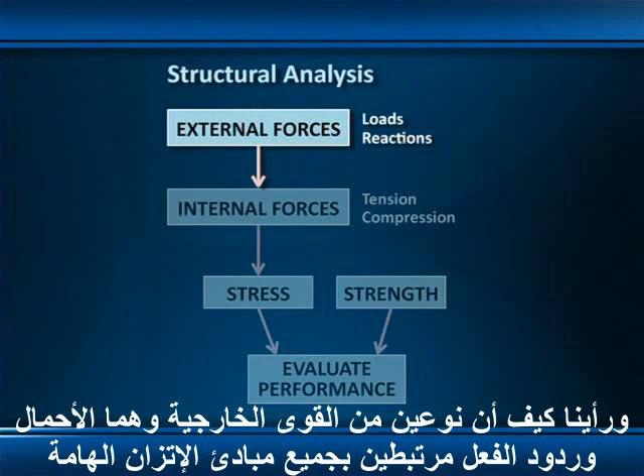Welcome back. Last lecture, we began our exploration of the science of engineering mechanics, the study of forces acting on bodies. To guide that exploration, we developed this roadmap, a diagram that shows the major concepts used in structural analysis. Last lecture, we focused on the first block of this diagram, external forces, and we saw how two types of external forces, loads and reactions, are related by the all-important principle of equilibrium.

Along the way, we met two men who pioneered the principle of equilibrium: Isaac Newton, who formalized the principle in his first law of motion in 1687, and Newton's predecessor, Simon Stevin, a unique Renaissance-era mathematician who developed the world's first proof of equilibrium using an ingenious thought experiment consisting of a string of beads draped over an inclined plane.

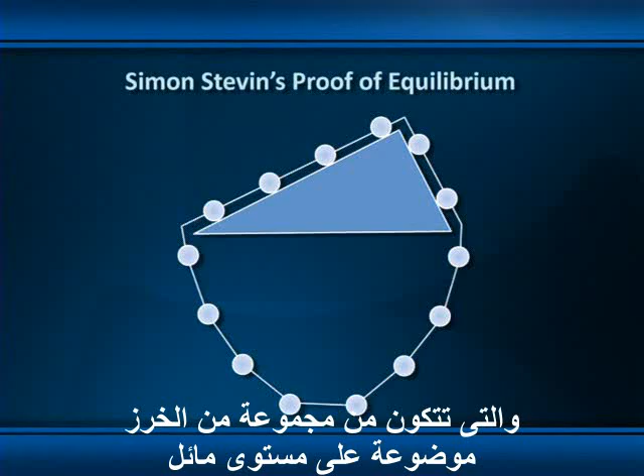Stevin was evidently quite pleased with this insight because in his book, underneath the diagram, he wrote, "What seems mysterious can be understood," a phrase he later adopted as his personal motto.

Well, in the spirit of Simon Stevin, let's focus this lecture on understanding the remaining major concepts of structural analysis on the roadmap: internal force, stress, and strength.

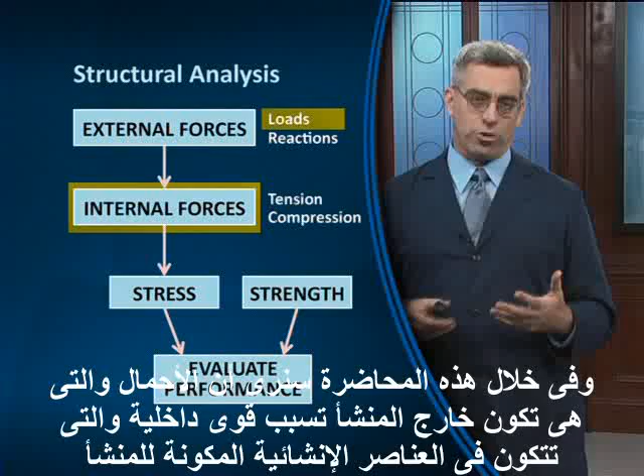During this lecture, we'll see that loads, which are external to the structure, cause internal forces to develop within the structural elements that compose the structure. And we'll see that these external and internal forces have to be in equilibrium with each other.

We'll see how internal force is manifested as stress, a measure of the intensity of that internal force. We'll also learn once again about strength, the characteristic value of stress at which a particular material fails, and we'll see where strength comes from, how it's determined experimentally in the lab. Finally, we'll compare stress with strength to evaluate structural performance.

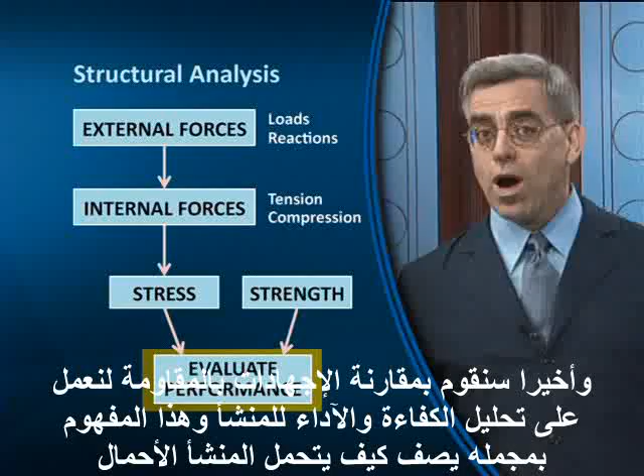These concepts in total describe how structures carry load, and so they'll lie at the very heart of our analysis of the world's great structures through the remainder of this course. When all is said and done, I hope that Simon Stevin's motto, "What seems mysterious can be understood," will ring true for you as well.

Now, there's a good reason why all this mysterious stuff can be understood. Much of what we know about the strength of engineering material is gleaned from a very simple laboratory test that scientists and engineers have been using for centuries. Today we call this the simple tension test.

It's done by simply taking a specimen of material, mounting it in a testing machine, and then using that machine to slowly pull on the specimen and stretch it in tension until it breaks in two pieces. That's it.

If you can understand this test and the information we glean from it, then you'll understand the concepts of internal force, stress, and strength, the subjects of today's lecture.

Oh, and by the way, the test specimen that I just used for our simulated simple tension test is, in effect, a structural element that's subjected to pure tension. In other words, it is one of our 6 basic types of structural elements.

So, by the end of today's lecture, you won't just understand these key concepts from our roadmap, you'll also understand how tension members work in great structures.

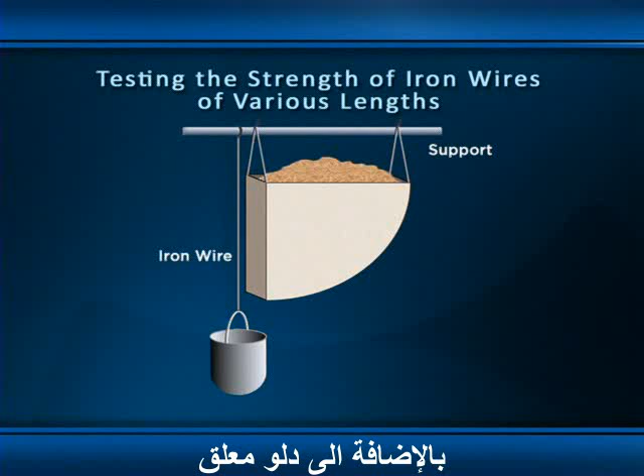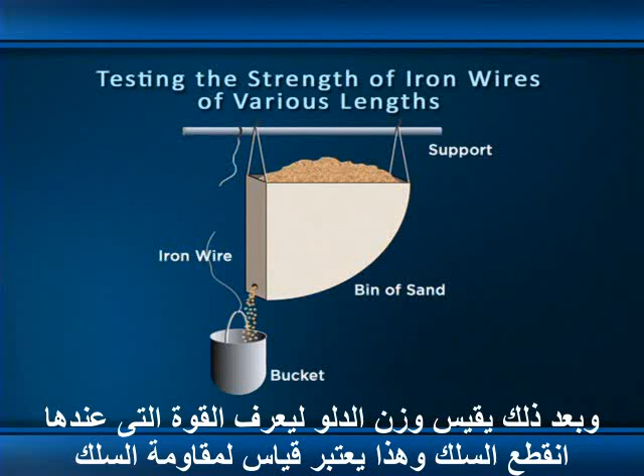To do the experiment, Leonardo hung a bin filled with sand above the bucket. He opened a hole in that bin and allowed sand to pour out into the bucket gradually until the wire broke. He then weighed the bucket to determine the force at which the wire had broken. This is a measure of the strength of the wire.

Now, as one of the earliest systematic experiments on materials, Leonardo's tension test was a noteworthy effort. But as science, it was mostly unsuccessful because Leonardo erroneously concluded from his experimental data that the strength of iron wire depends on its length. In fact, what we know today is that the strength of any tension member is actually independent of its length, a fact that ultimately was proved by our next great pioneer of engineering mechanics, Galileo Galilei.

Galileo published the world's first comprehensive scientific study of the mechanics of materials in 1638. And in an interesting, indirect way, we actually owe this publication to the Catholic Church.

6 years earlier, Galileo had defied the Church by publishing his assertion that the Copernican theory of planetary motion was indisputable truth. As a result, he was called to Rome, he was condemned, ultimately placed under house arrest in his villa in Tuscany for the remaining 8 years of his life.

Throughout these final 8 years, Galileo focused his work primarily on mechanics, probably because the subject was likely to be significantly less controversial than cosmology. As a result, his great work was published during this period. It was titled Two New Sciences and really was his seminal treatise on engineering mechanics.

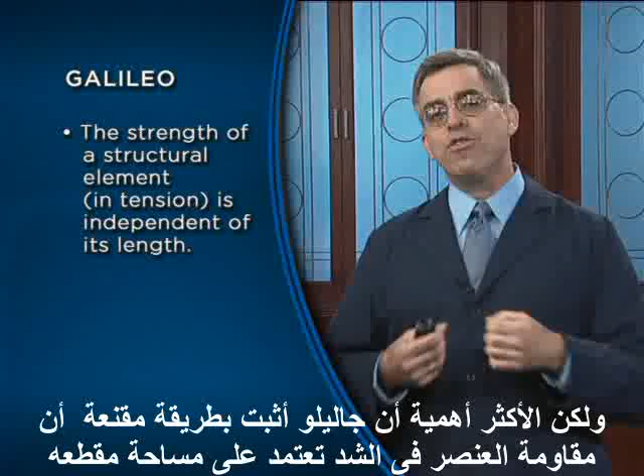Galileo's experiments established the fact that the strength of a structural element is independent of its length, and thereby he disproved Da Vinci's earlier experimental results. But more importantly, Galileo showed convincingly that the strength of a member in tension depends on that member's cross-sectional area.

Okay, so what's a cross-section and what's cross-sectional area? Well, the cross-section of a structural member is really just the two-dimensional shape that's formed by cutting through the member on a plane perpendicular to its long or longitudinal axis.

So if this were a concrete member, it's cylindrical in shape, the long or longitudinal axis of the member is running this direction, and when I make a cut, I expose this shape, it's a circle, and that circular two-dimensional shape is the cross-section. The cross-sectional area then is simply the area of that circle, pi r squared.

Many other types of configurations of structural members are possible, and you've seen them in the world all around you. This is a standard 2x4 piece of lumber that's used often in construction, and it has a rectangular cross-section. In fact, the very definition of the member, the 2x4, describes the dimensions of that rectangular cross-section.

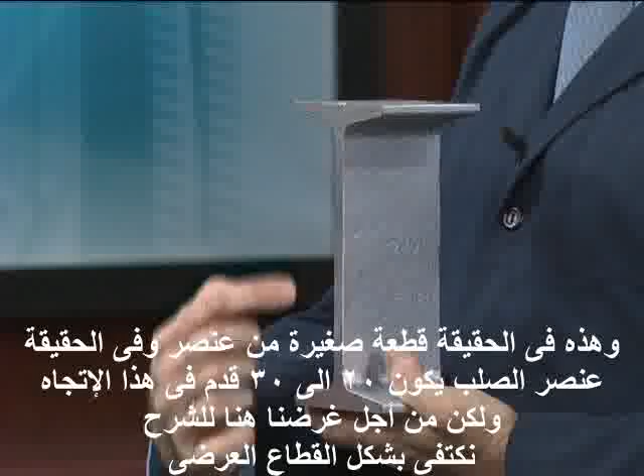In steel, we often see structural elements made with an I-shaped cross-section. Now, this is really just a short segment of member. In practice, the real steel beam probably runs about 20 or 30 feet in this direction. For our purposes here, we're really just concerned with the cross-section itself, which forms an I shape, as you see here. And later on, we'll talk in more detail about I-shaped sections.

For now, recognize that it's composed of three elements. The top and bottom horizontal planes we call flanges. The vertical plane we call a web. And steel cross-sections are also available and often used in hollow tube configurations. This one happens to be square, but we also often see hollow tubes that are rectangular or circular in geometry.

Okay, so back to Galileo. Now, based on his experiments, Galileo discovered that the strength of a member is directly proportional to its cross-sectional area. For example, a member with a cross-sectional area of 10 square inches is twice as strong as a member with a cross-sectional area of 5 square inches, as long as they're made of the same material.

This discovery eventually led to the development of the concept of stress. But it took a long time, almost 200 years, for engineers and scientists to ultimately get to that conceptual understanding.

In the meantime, around 1650, an English scientist named Robert Hooke also performed an extensive series of tests on iron wire. These were similar to Leonardo's and Galileo's experiments in that a piece of iron wire was subjected to tensile loading, but Hooke went a crucial step farther.

Rather than simply determining the breaking point of the wire, he also investigated how it elongated under the full range of load, from 0 all the way up to the breaking point.

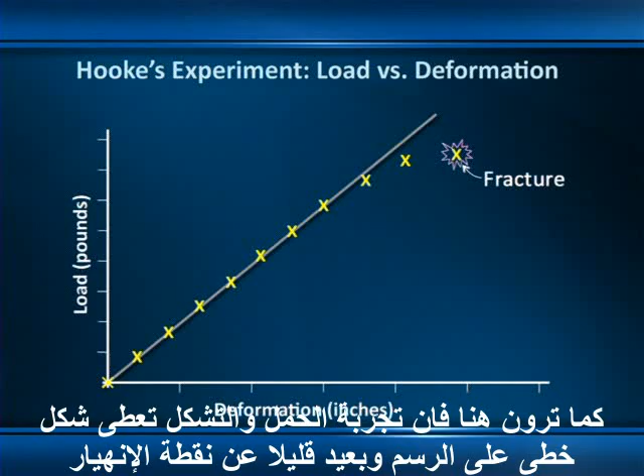Hooke probably made this discovery sometime in the 1650s, but he didn't actually publish it until 1678 because the discovery actually gave him the capability to build very accurate clock springs, and he didn't want to give away his competitive advantage. When he did publish the discovery, he used a simple Latin phrase, ut tensio sic vis, as the extension, so the force.

The discovery of this linear relationship between load and deformation is so important to modern engineering mechanics that even today we call it Hooke's law.

Groundbreaking as it was, Hooke's discovery was fundamentally limited by the fact that he only ever considered the external forces acting on the test specimen. He never actually made the conceptual leap from external force to internal force and then stress.

To see what Hooke overlooked, let's return to our tension experiment and draw a free body diagram of the test setup.

First, we isolate the member, the simple tension member. We then add the load down at the bottom, 4 pounds oriented in the vertical direction, downward. Up above, we'll add the reaction that keeps the body in equilibrium. We'll label that R. And since the body is in equilibrium, we know that because it's not moving, then all the forces acting on it must be in balance.

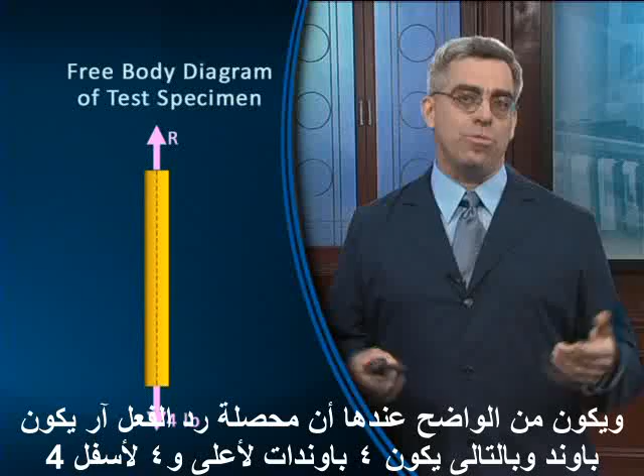Clearly then, the magnitude of that reaction has to be 4 pounds. We have 4 pounds up and 4 pounds down.

This configuration, by the way, is often called axial loading because both the load and its reaction are aligned with the long, or in this case, the longitudinal axis of the member.

But both the load and the reaction are external forces, and what we're interested in understanding is what's happening inside the member. To do this, we have to do another thought experiment.

What we're going to do is imagine cutting completely through the member to expose that internal force. And then we'll use the principle of equilibrium to figure out what that force actually is. Let's use our free body diagram as a way to see how this process works.

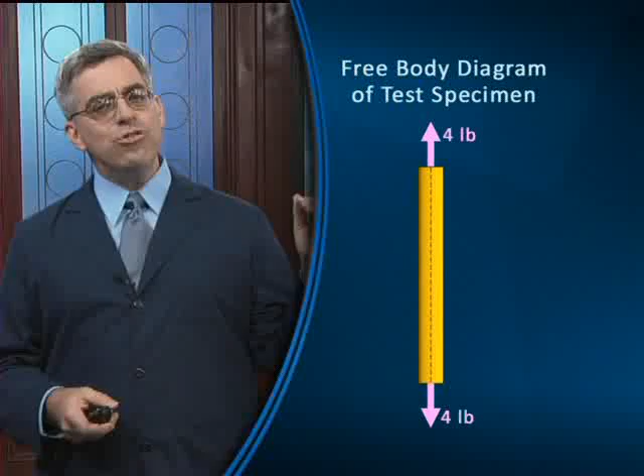Here's the free body diagram, once again, of our tension test specimen. And now here's the location of the cut. It's just a conceptual cut, but it's used as a problem-solving tool.

Now we can isolate the portion of the member that falls below the cut and draw a separate free body diagram just of that segment. The 4-pound load is still applied on the end of the segment, and so the only way that this segment can possibly be in equilibrium is if there's some additional force acting up there on the face of the cut.

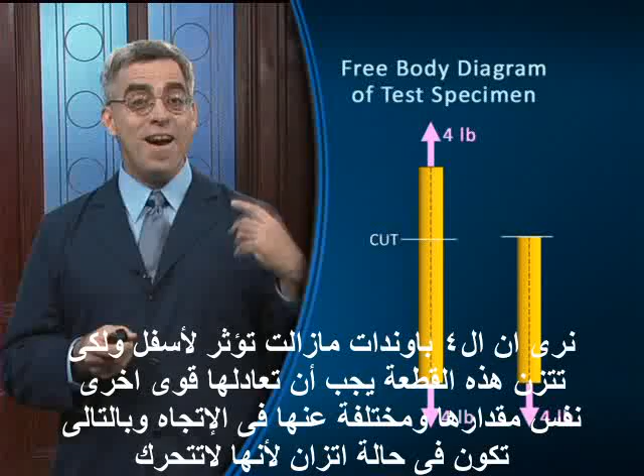We know this little segment is in equilibrium because it's not moving, and therefore there is a force on the face of that cut, and that is the internal tension force, which you can see here. Clearly, the principle of equilibrium tells us that this internal force, F, must be exactly equal to the external load, 4 pounds.

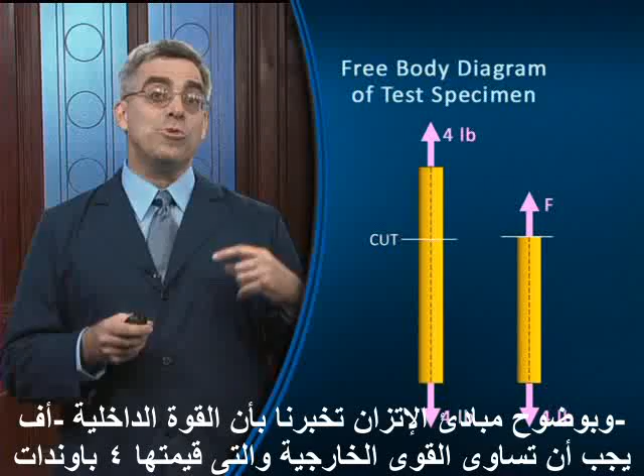Okay? Now, at first glance, this analysis might seem trivial. We applied a 4-pound external load, and it resulted in a 4-pound internal tension force. What's the difference?

Well, there is a difference. It's very important to recognize that the external load and the internal force are two very different things. In the simple tension test, they happen to be equal. But in many other situations, they won't be equal.

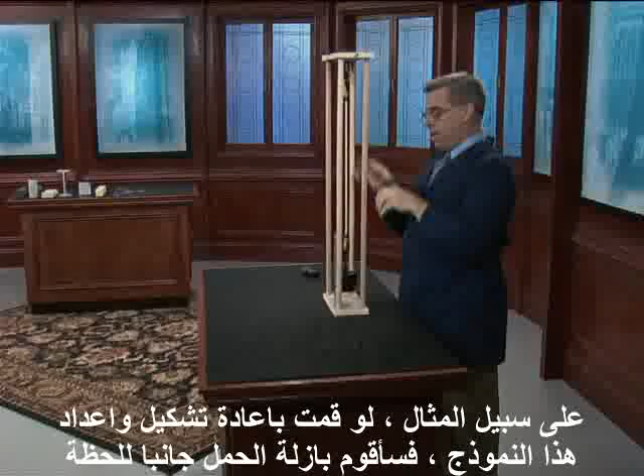For example, if I just reconfigure this experimental setup, that is, if I take the load off for a moment, and rather than having the load suspended from a single wire in one uniaxial test setup, suppose the load is suspended from two wires, which are oriented such that they form an angle.

Now, in this circumstance, there is not one internal force, but two different internal forces, and both of them will turn out to be substantially different from the externally applied load.

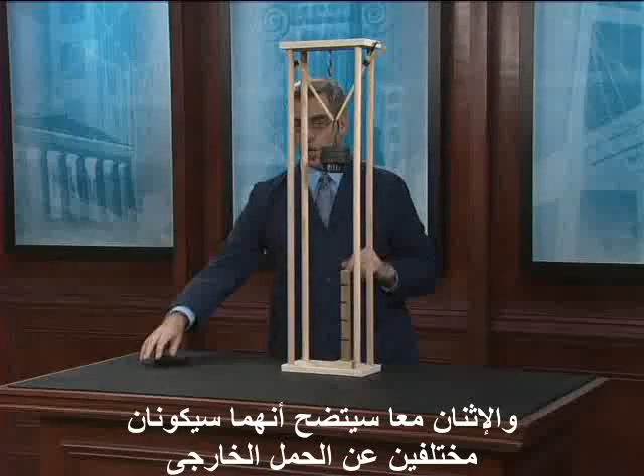More importantly, the external load and the internal force are fundamentally different phenomena. The external load is a concentrated force that's transmitted to the member or members through some sort of physical connection to another object.

In this case, the connection is the pan holding that 4-pound weight. The internal force, on the other hand, is an attraction between the molecules that constitute this material. It is internal. When we apply a load to a structural element, it stretches slightly.

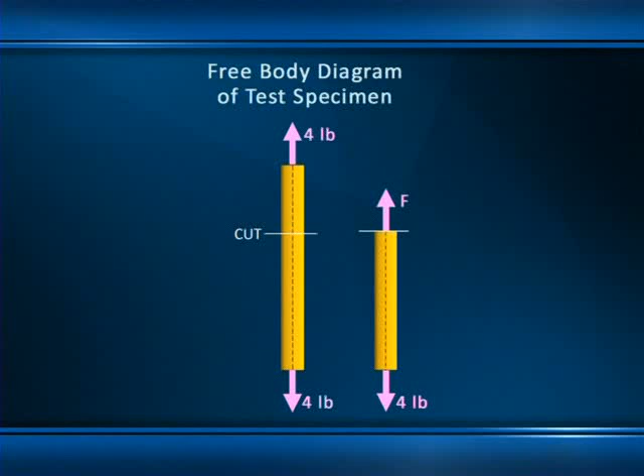As a result, the individual molecules that make up the material have to move away from each other ever so slightly. The chemical bonds between these molecules are very strong, and they resist being deformed. This resistance, accumulated over the entire cross-section of our conceptual cut, is the internal force that keeps the lower portion of this member, as you see it in our free body diagram, in equilibrium.

This idea of internal force as an accumulation of molecular level resistance to deformation is a really powerful concept that actually leads us directly to the concept of stress. This concept was vaguely suggested, indirectly, by Galileo's experiments of 1638. But it wasn't until 1822 that the French mathematician Augustin Cauchy actually formulated the concept of stress as we know it today. Stress is the intensity of internal force in a member.

In an axially loaded member, it's calculated simply as the internal force divided by the cross-sectional area and expressed in units of force per area. For example, pounds per square inch, newtons per square meter. Stress is independent of geometry and material type. For example,

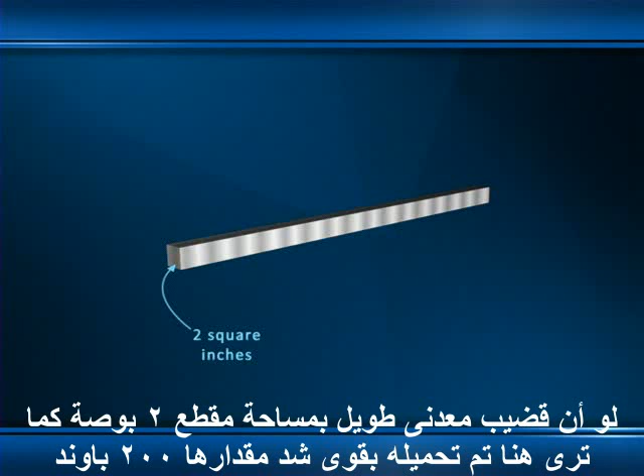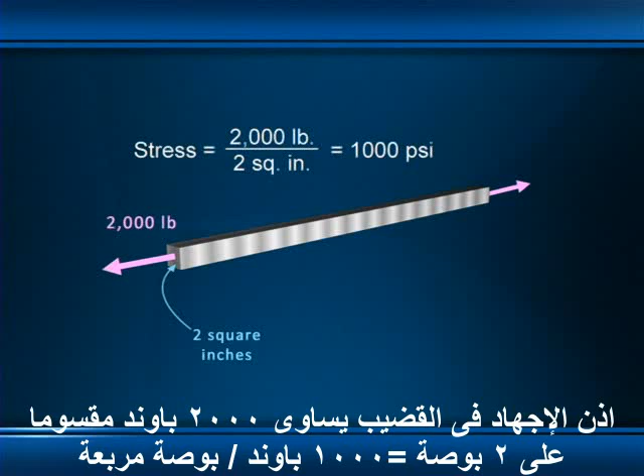if a long steel bar with a cross-sectional area of 2 square inches, as you see here, is loaded with a tensile force of 2,000 pounds, then the stress in the bar is 1,000 psi, 2,000 divided by 2. Now, if a short concrete cylinder that has a cross-sectional area of 10 square inches is loaded with a tensile force of 10,000 pounds, well, the stress is still exactly the same. It's 1,000 psi. In this case, 10,000 divided by 10.

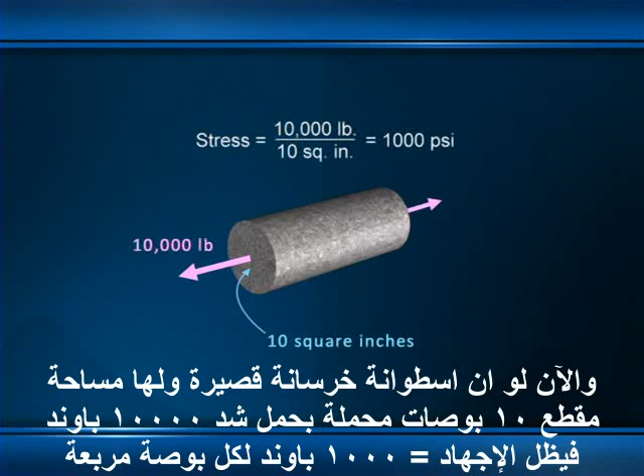The concept of stress is so powerful because the strength of a material is defined in terms of stress. For example, the strength of standard grade structural steel is about 36,000 pounds per square inch. Doesn't matter if the piece of steel is long or short, wide or narrow, circular or I-shaped, the material will fail when the stress reaches 36,000 psi.

Okay, that's stress. Next, Augustin Cauchy's second contribution to today's lecture is the associated concept of strain. Just as stress is the intensity of internal force, strain is the intensity of deformation. As we saw in Robert Hooke's experiments, a member loaded in tension elongates. Strain is a way of characterizing this elongation in a particularly useful way.

Now, beware that in everyday usage, the words stress and strain tend to be thrown around in a very imprecise way and often are used more or less synonymously. In engineering, these are distinctly different concepts, and you have to use the terms very precisely. Stress is a measure of internal force. Strain is a measure of how much the member deforms under load.

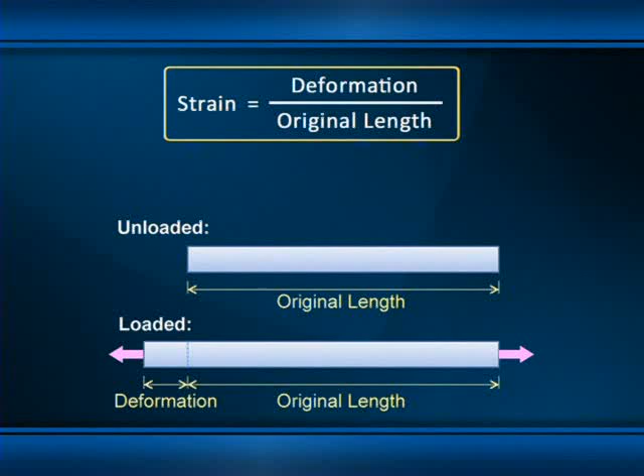To calculate strain in a tension member, we simply divide the amount of deformation by the original length of that member. For example, if the member is originally 100 inches long and it deforms 2 inches under load, then the strain is just 2 divided by 100, or 0.02. Now notice that strain has no units. In the calculation, inches are divided by inches, so the units cancel out.

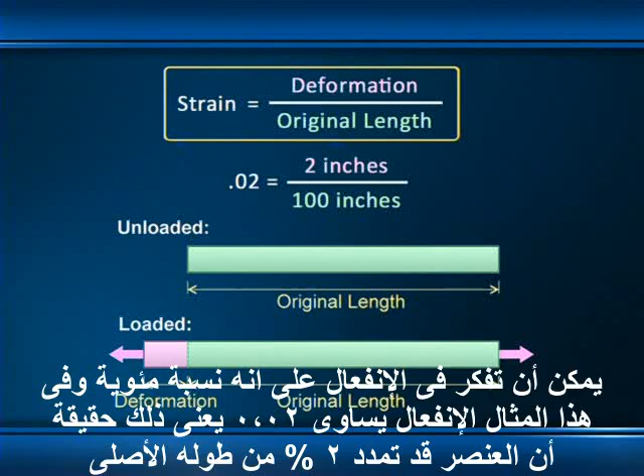You can think of strain as if it's a percentage. In this example, a strain of 0.02 actually means that the member has stretched 2% beyond its original length. So it's really not a complex concept.

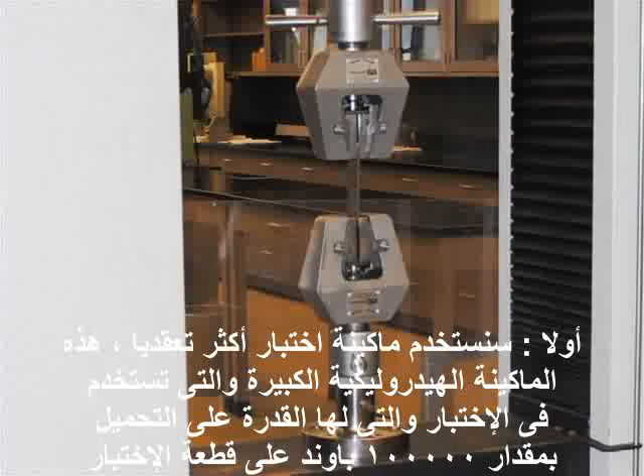So we'll be able to test much larger specimens rather than just thin wires. The machine also has a built-in measuring device that automatically records load and deformation of the specimen very accurately, so we don't have to do the manual measurements that we saw in my earlier simulation. Second, rather than plotting our results in terms of load and deformation as Robert Hooke did, we're going to plot our results in terms of stress and strain. Remember, the conversion is quite simple. To plot stress, all we do is take the measured value of load and divide it by the cross-sectional area. To plot strain, we take the measured deformation and divide it by the length of the original specimen.

If I test 10 different specimens of different shapes and sizes that are all made of the same type of steel, the stress-strain curves for all 10 tests will look exactly the same, just like this one. The curve tells us almost everything we need to know about a material's mechanical properties and its suitability for a particular structural task. Think of it as the fingerprint of an engineering material, and you're pretty well along the way to understanding why it's so valuable to us.

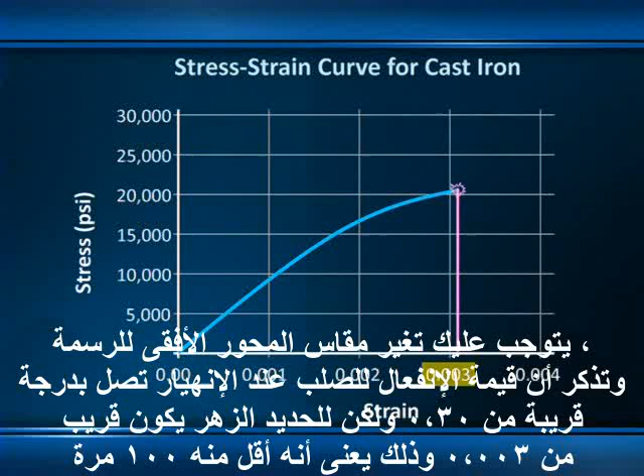Remember, the stress-strain curve is the fingerprint of the material. The differences between these two fingerprints tell us a tremendous amount about how these materials work in structural applications. They allow us to distinguish between the important mechanical properties for the purpose of design.

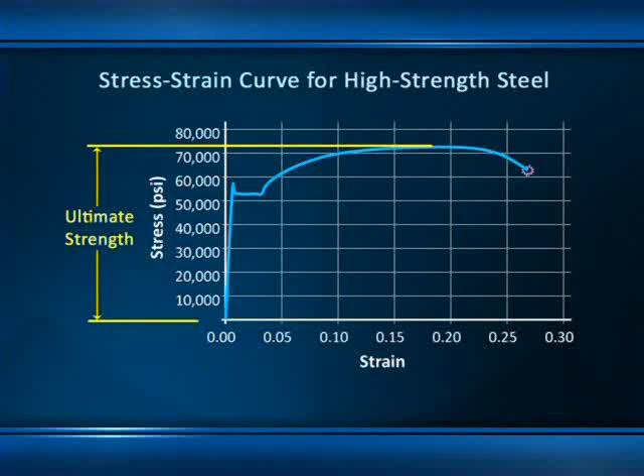The second important material property is represented by the width of the curve, and it corresponds to the material's capacity to undergo large, permanent plastic deformations before it finally fails. This capacity is called ductility. We'll talk a lot more about it next lecture.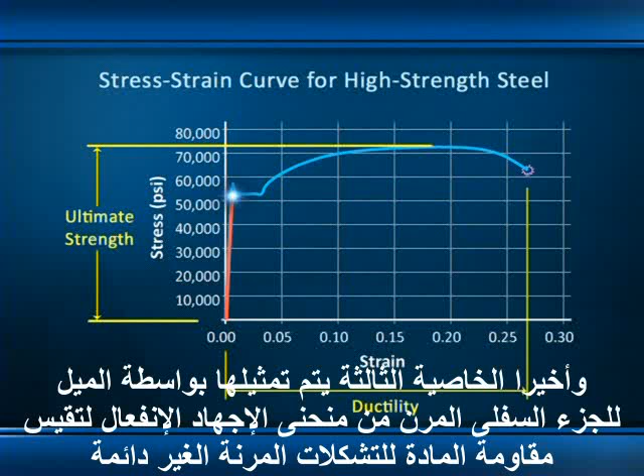Finally, the third property is represented by the slope of the lower elastic portion of the stress-strain curve. It's a measure of the resistance of the material to elastic, or non-permanent, deformation. This property is called stiffness. We're going to revisit these ideas of ductility and stiffness in more detail next lecture.

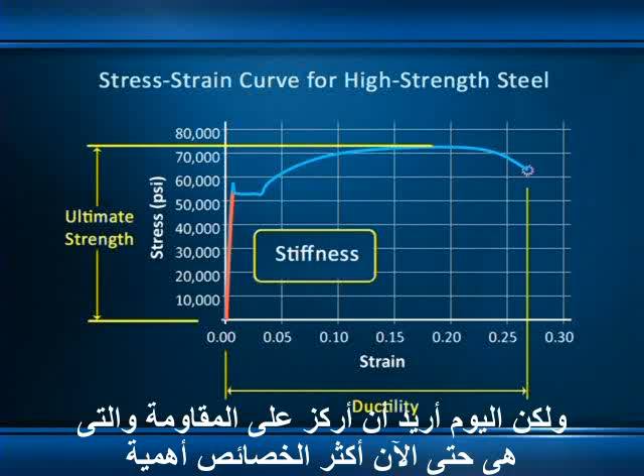For today, I just want to focus on strength, which is by far the most important of the three material properties. As our roadmap reminds us, strength is the principal basis for evaluating the performance of a structural element. When the actual stress in an element is greater than the strength, the material will fail; when the stress is less than the strength, it won't. Engineers use this fundamental evaluation as the basis for designing structures—that is, determining the size and shape of each individual member to ensure that stress is always less than strength, no matter what the externally applied loads are.

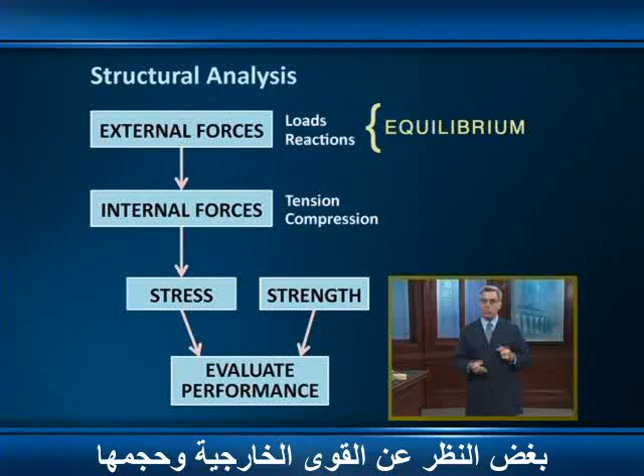Now our exploration of the structural analysis roadmap is complete, and I hope that Simon Stevin's motto has proved to be true for you as well: what seems mysterious can be understood.

Remember that in every one of the experimental tests we've just looked at, the test specimen was a tension member—axially loaded in tension with a tendency to elongate. So our exploration of the concepts of internal force, stress, and strength has also taught us everything we actually need to know about the first of our six basic structural element types.